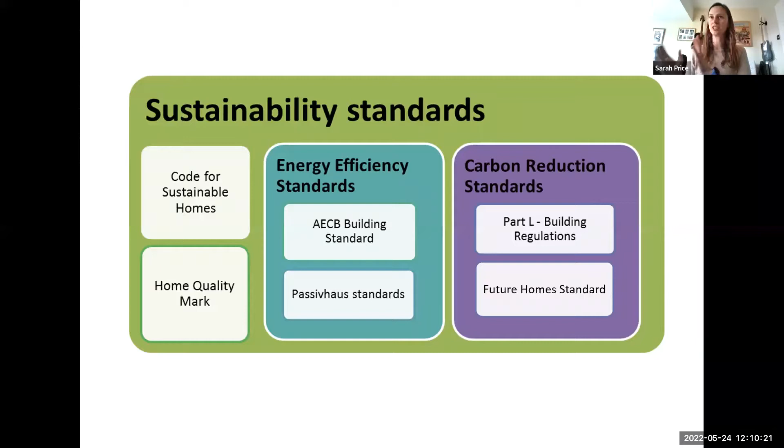So the AECB was founded in 1989, and they actually launched the Passive House Trust in 2010. So they brought Passive House to the UK. And their purpose is to deploy environmentally responsible building practices. So the AECB really looks at the cutting edge of what's going on in buildings, in retrofit, in new build, and making sure that we are doing the very best when it comes to our buildings.

They do an awful lot of training. They do loads of things as a membership organisation, obviously, lots of training under the CarbonLite brand. But we also have these standards, AECB building standard, and there's a retrofit standard as well. And it's the building standard that we're interested in today. I'll talk a bit more about that in a second, but there's also some complementary mini standards, if you like, around water, daylighting, and whole life carbon as well, which is the newest one.

So the AECB standard is based on the Passive House Standard. So originally we used to have different levels, silver and gold, and the gold was replaced by the Passive House Standard, and then the silver became the AECB building standard that we know today. It's got slightly relaxed targets compared with Passive House, so the space heating demand isn't quite as onerous, but there's still quite a good air tightness target. And essentially, the rest of it follows all the rules of Passive House.

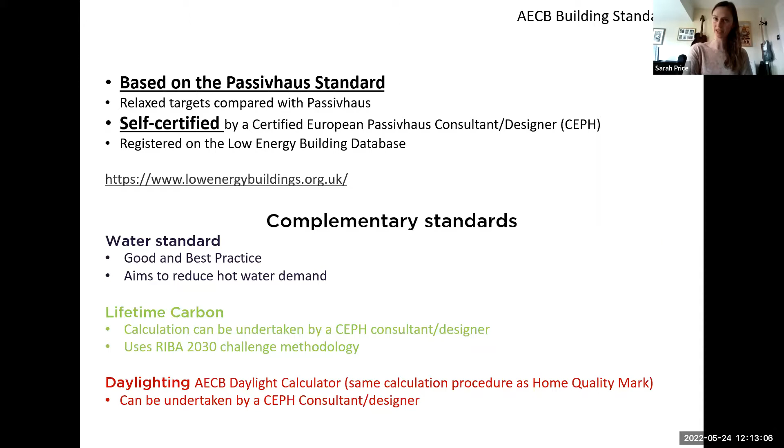So AECB and Passive House principles are that we are aiming for low energy bills and comfortable living conditions. We've got possibly southern orientations, but we're making the most of that solar gain without having summertime overheating. We've got high levels of insulation, ideally a thermal bridge free design, or certainly continuous insulation. We've got continuous air tightness, absolutely, so really low levels of air tightness.

And in Passive House, certainly we have high efficiency heat recovery, MVHR. The AECB is actually slightly flexible. You can have MEV or MVHR, but today we are really focusing on the MVHR side of the AECB standard and the air tightness that goes with that. So the 1.5 air changes that goes with that MVHR.

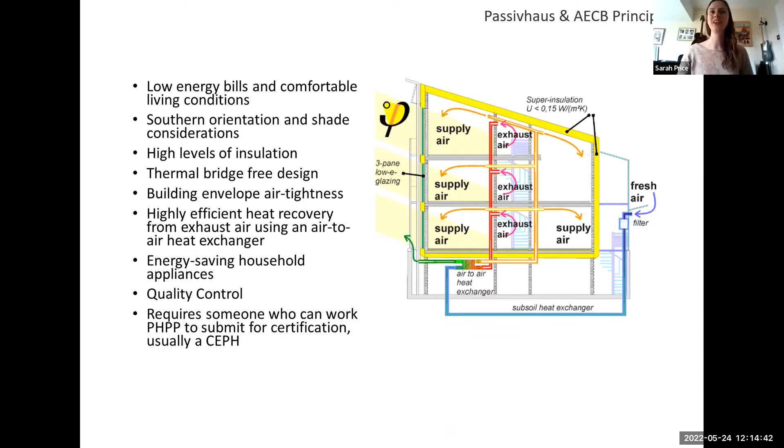Obviously, it's not all just about space heating. We have to look at everything that goes in the building. So we're talking about regulated and unregulated. And then we've got a quality control process. So in passive house, it's slightly more rigorous. You have obviously this third party independent certifier who checks all of the information that's coming in. And in AECB, you have to bare all and put it all on the internet in order to get your project certified and upload certain types of evidence that's required for the low energy building database.

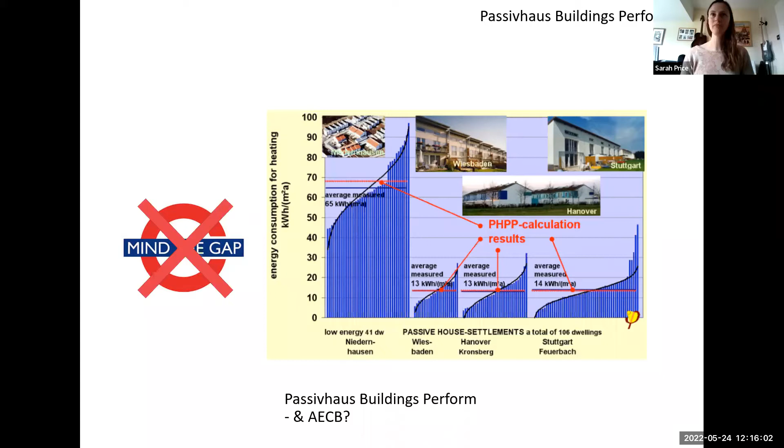There is evidence that AECB buildings are following the same kind of profile. So they've redone this research in the UK for passive house buildings, and their findings are the same. For AECB buildings, it's not yet published, but there is evidence out there that they do also perform.

So on the other side of things, we get a lot more out of passive house and AECB because we get superior comfort. So sometimes passive house is known as a comfort and energy standard. And that's simply because you go in a passive house and you don't notice it. You don't notice you have hot head, cold feet or anything like that. It's just perfectly still, it's perfectly quiet, reduces noise pollution because of the air tightness. You've got no temperature gradients, there's no drafts.

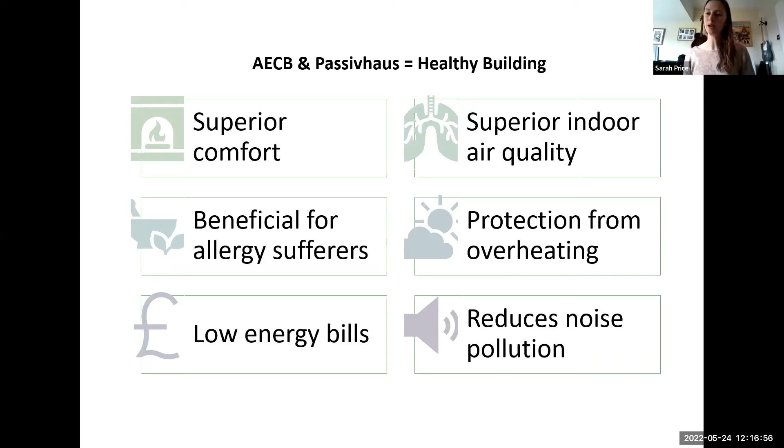A really good indoor air quality, so it doesn't feel stuffy. It's not too hot, it's not too cold, so we've got protection from overheating. It's beneficial for allergy sufferers on the health side because we're trying to filter out all of those pollutants from inside and outside of our homes and buildings. And we've got really low energy bills as well. So lots of other benefits from AECB standard.

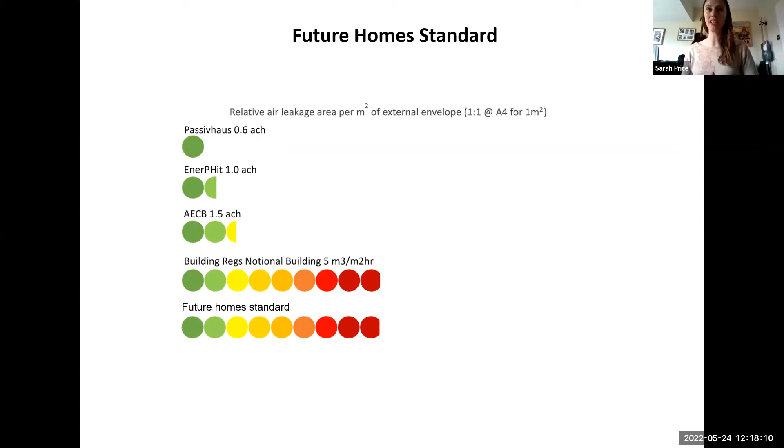Now for passive house, obviously it's quite small, and EnerPHit, the passive house retrofit standard, a little bit bigger, and then the AECB MVHR at 1.5 air changes. Building regulations notional building is set at 5 metres cubed per metre squared hour, and you can see quite a lot more holes in every metre squared. Now, where are we going with the future home standard? Therein lies the problem. We're not going anywhere with it in terms of air tightness. The suggested future home standard indicates that there's going to be no improvement in air tightness.

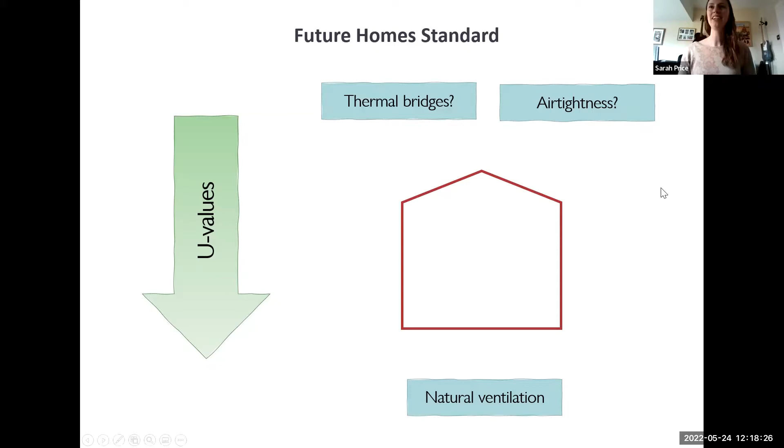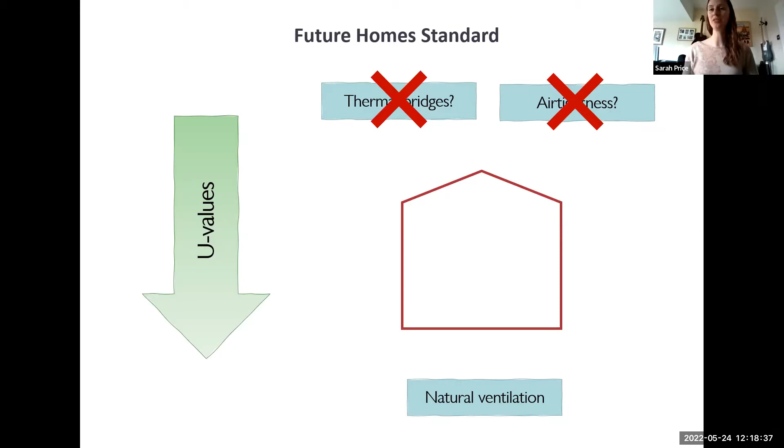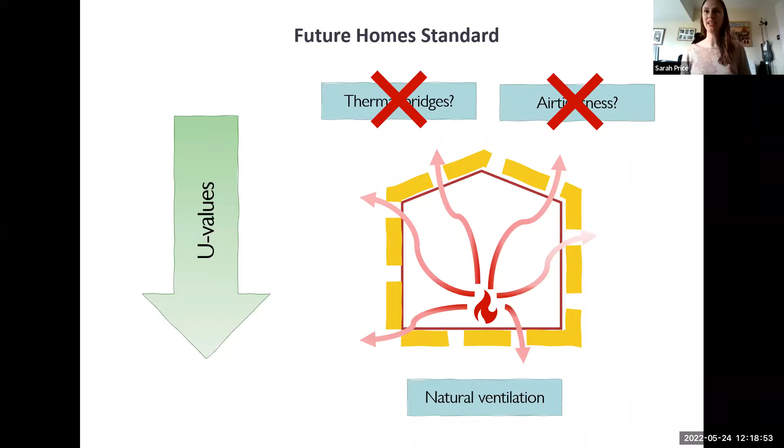So what we do see is a dramatic drop in U values. So we are really increasing the amount of insulation we're going to put in our buildings. But is it really dealing with thermal bridges and air tightness? Unfortunately not. We're not seeing any improvements in air tightness or any improvements in thermal bridging, and it still allows natural ventilation. So actually what we're doing is building really well insulated wind tunnels. So lots and lots of insulation, but it's not continuous. We haven't got good air tightness, we've got natural ventilation, so we're going to be letting a lot of that heat out in other ways.

This takes us nicely on to Wolfgang Feist, who was the father of Passive House in Germany. In the late 1980s, he gave this statement: "I was working as a physicist. I read that the construction industry had experimented with adding insulation to new buildings and that energy consumption had failed to reduce. This offended me. It was counter to the basic laws of physics. I knew they must be doing something wrong, so I made it my mission to find out what and to establish what was needed to do it right."

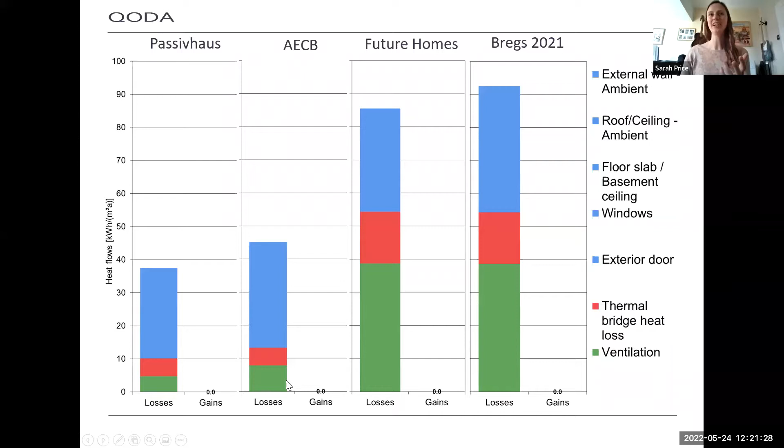Future Homes Standard, U values are improved, so we can see the blue bit is reducing a little bit, which is what we'd expect to see. However, no improvement in thermal bridging, no improvement in ventilation. AECB standard at 1.5 air changes really improves ventilation. We've got an MVHR as well, so we're recovering heat. We've reduced the thermal bridging. U values are about the same, but you can see that we've almost cut in half the total heat losses. And then Passive House reduces that a little further still because it's better air tightness. So you can see that what is left is really concentrating on thermal bridges and ventilation.

So I'm going to hand over to Tim, who's going to tell me when he needs his slides changing. Yeah, great. Thank you, Sarah.

Good morning, everybody. So we've been modelling 6 residential archetypes for a regional district council in England, pretty representative of anywhere. And we've developed a series of specifications based on different building standards. We've tried to apply a level of parity between the Future Homes Standard and the AECB and Passive House standards. So the AECB and Passive House specifications are actually a reflection of the Future Homes notional building standards as far as we know them. And they're not tied specifically to the AECB or Passive House targets, such as space heating demand. It's really just trying to get that notional parity between the standards.

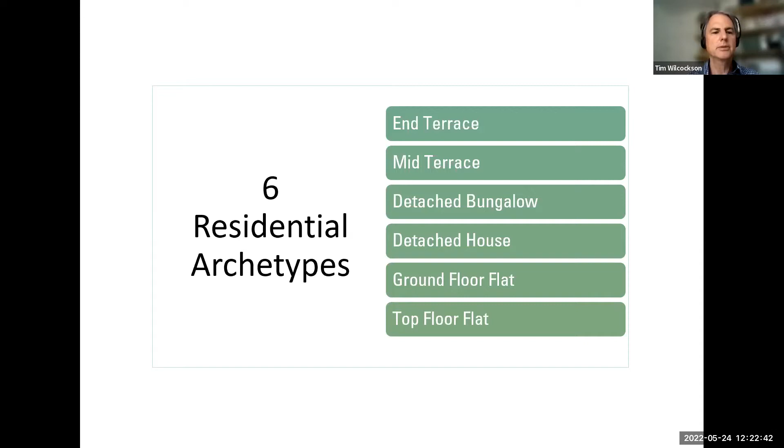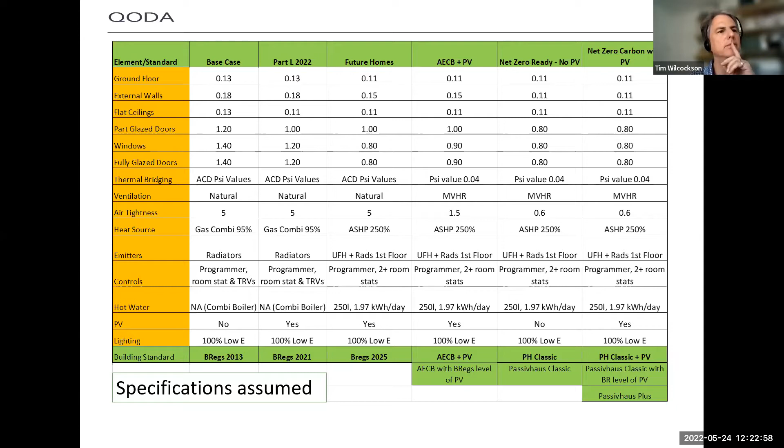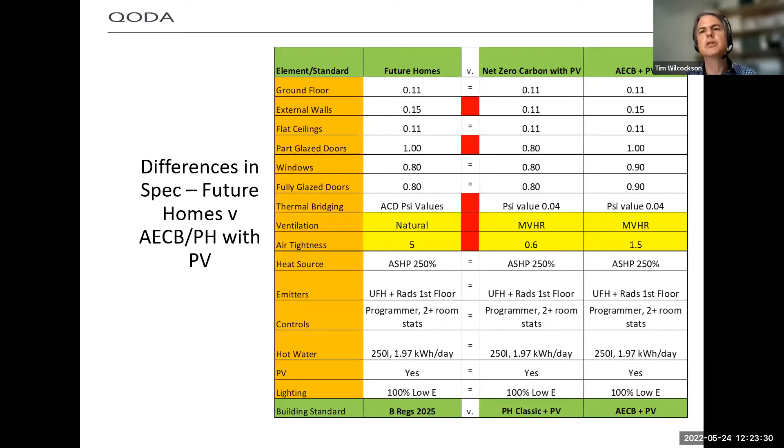So comparing these standards isn't ideal. Sorry, I forgot to say next. So these are the specifications assumed. We've got the different standards, and you can see the differences in the specifications in terms of the fabric are pretty similar, whether it's Future Homes or AECB or Passive House. They are remarkably close on that level. However, I would like you to notice the levels of air tightness difference and the type of ventilation system, which we see as the key elements when building future homes. Next.

So like all building regulations, Part L, Future Homes is rooted in the SAP methodology, and the new SAP 10.2, which will go live in June alongside the Part L 2021 regulations, will adopt increased cost per kilowatt hour. As we all know, it won't necessarily reflect exactly what we're actually paying. I've seen already for my home that we're going to be paying about 29-30 pence a kilowatt hour, maybe more. So energy costs are rising fast. But next slide.

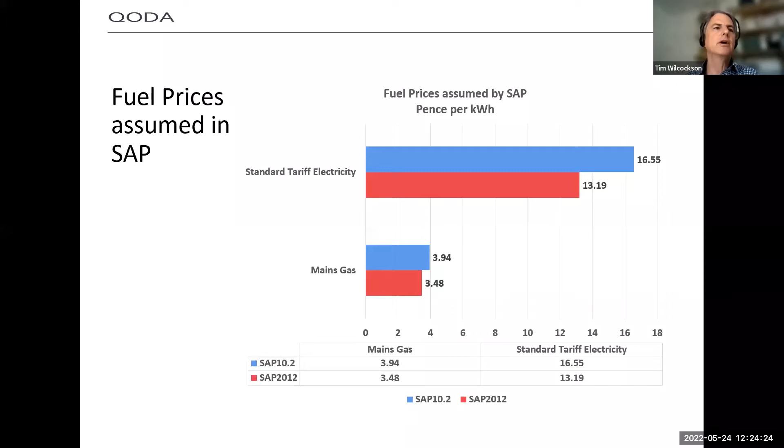The fuel carbon emission factors are coming down in SAP 10.2. So the Future Homes Standard has a stated aim of reducing carbon emissions by 75% and promotes electrification. I find it a rather curious coincidence that the contribution from renewables nationally has been calculated and apparently shows a 73.8% reduction in carbon emissions from electricity since the last evaluation in 2012. By contrast, there is little change in the carbon emissions factor for gas, but the electricity reduction is significant. Next.

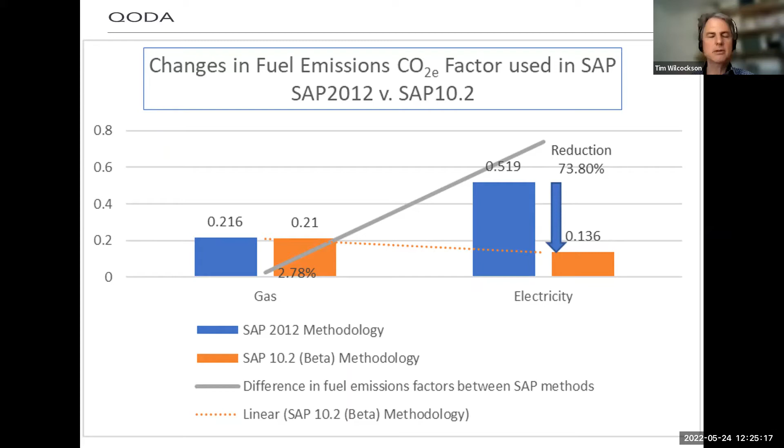So if we look at just one of these archetypes, we can see that while the building regs in 2013 and 2021 have relatively high CO2 emissions, the Future Home Standard appears to be heading towards net zero operational targets for 2050 with the aid of PV. This is using the PHPP methodology. And we can see a trend line showing a steady reduction in CO2 emissions via the different standards, as you'd expect, with significant improvements arising from the Fabric First approach.

In this example, the Future Home Standard, the AECB and the Passive House all achieve at least an 80% reduction in emissions compared to the 2013 building regs, and so are within the government target to align with net zero by 2050 through the decarbonisation of the national grid.

But the equivalent AECB and PH Classic standards with the building regs level of PV requirement, which is derived from a floor area formula, cut the carbon emissions by at least half again when compared to the Future Home Standard. And if you take the regulated emissions only, in the blue columns here, which is the SAP approach, you can demonstrate you're carbon positive.

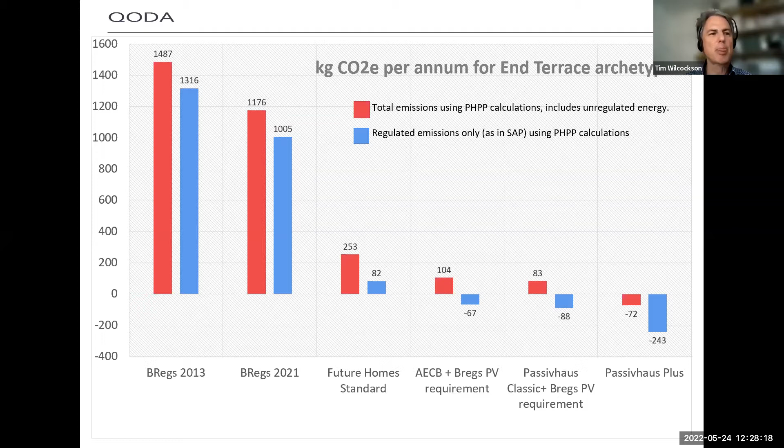So another way to look at this is to start with a fabric first approach, incorporating the MVHR ducting and air tightness that we need, and then add PV retrospectively, taking advantage of future improvements in PV efficiencies to enable minimal CO2 emissions. Something like the new panels based on perovskite, for example, in Oxford. This approach sounds remarkably like the Future Home Standard approach. It reduces long-term retrofit costs and occupant disruption, while locking in carbon savings for the lifetime of the building.

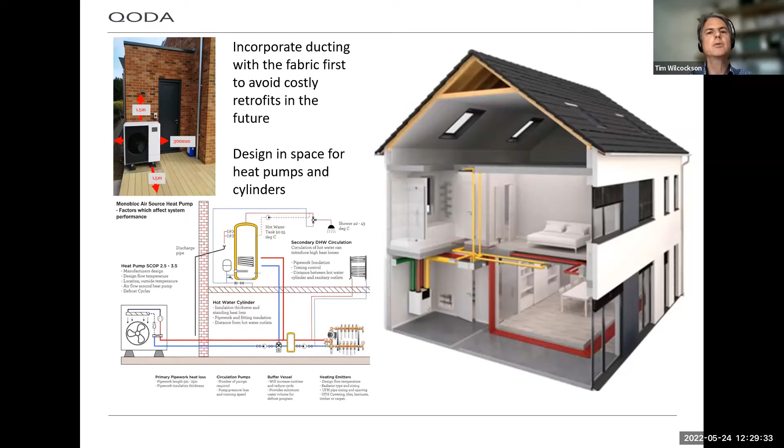Future-proofing by designing in space for heat pumps and hot water cylinders or cabling for energy storage would be sensible design precautions to ensure the fundamental fabric of a new building doesn't need to be disrupted. However, the Future Home Standard fails to provide the key element in the jigsaw, which is the air tightness of 1.5 or less with an MVHR system. Next.

So here we're looking at the space heating demand. We've looked at the downward trend of the CO2 emissions, but the more significant, in my view, startling finding from our analysis is the space heating demand story. Looking at the 6 archetypes again, the SAP 10.2 software gives us failures on the 2013 building regs, as you'd expect. No surprises there.

And the Future Home Standard and Passive House Classic both pass building regs as anticipated, with the Future Homes archetypes achieving net zero in 4 out of the 6 house types. Whereas in the Passive House approach, they're all achieving net zero effectively with SAP 10.2. The End Terrace only fails by 0.2%, so I'm counting that as being net zero really.

If we compare the space heating demand results of the Future Home Standard with any of the Passive House standards, there is in fact a further 78 to 96% reduction in the heating costs, according to SAP. So we're led to the question, is the Future Home Standard adequate for tackling fuel poverty? Especially in the current fuel and cost of living crisis, is it fair that we build homes to a Future Home Standard that actually costs 75% more to heat than it really should for a modern home?

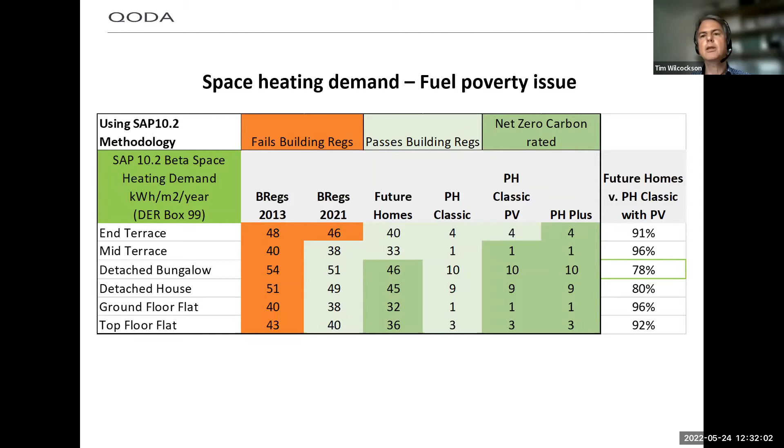The cost of constructing an AECB or Passive House Standard home has been shown to be an uplift of about 6 to 8% compared to constructing a Future Home Standard home. But the annual long-term savings in energy bills that the AECB approach can bring will hugely benefit individuals and bring many other positive impacts locally and nationally in ways that more than repay these upfront capital costs. Next slide, please.

So the Future Home Standard shows high levels of space heating demand here. Take the End Terrace, 68 there. AECB, 21 kilowatt hours per meter squared per year. We've got the same amount of PV on the AECB example as on the Future Homes example, and yet on the AECB standard we can still see a 63 to 77% reduction in space heating costs. And if we were to build it to Passive House Classic standards, we'd be talking about 71 to 86% savings on space heating.

So this slide alone, I think, demonstrates why the Passive House approach is important for people living on a low income. And of course, it benefits the country as a whole with more cash available for infrastructure. And we've got an example of Exeter Council where they've had a Passive House approach to building for some years now, and they've shown time and again they've got a better retention of tenants, lower property voids, people pay their bills, there's less stress for tenants and management. So everybody's a winner. Next slide, please.

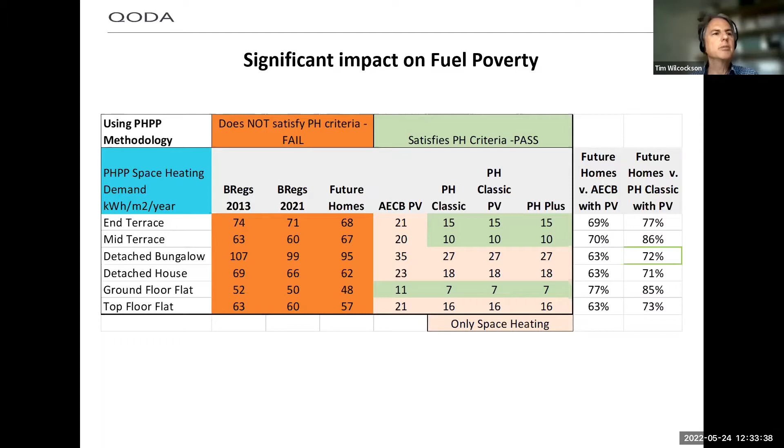And the International Energy Agency report back in 2014 illustrated some of the benefits of this low energy approach. It really has a very big impact in many areas of our lives. Next slide, please.

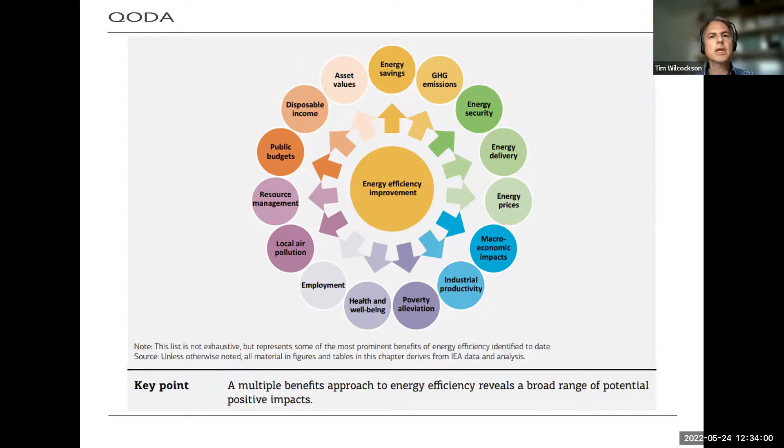So when we look at these two approaches, whether it's through the SAP building regs approach or through PHPP, we can see in both cases that there is a dramatic reduction in space heating. What we see with the Future Home Standard is that we can provide a well-insulated wind tunnel, as Sarah has mentioned. But really what we're looking to is get some woolly jumpers with a Gore-Tex wind barrier included if we take the AECB and passive house approach. It's really not complicated. We've just got to get the air tightness sorted out.

So SAP tends to focus on the carbon emissions, but as we move to decarbonisation, this focus will become less useful as a metric, and energy usage or energy demand will become the primary question. This is what LETI's arguing for, a more honest approach to our energy needs to inform our energy policies.

If we look at the yellow line, which is the detached bungalow, we can imagine that could be occupied by a person on a low income or with a disability or both. That's one injustice we could easily remedy by better air tightness, more robust fabric, and a good ventilation strategy. Space heating is, I think, about social justice in the end. It's not just about saving the planet. And it's what we're trying to do at regional level policy making, somewhere where everyone can afford to be more comfortable, healthier, and warmer. Over to you.

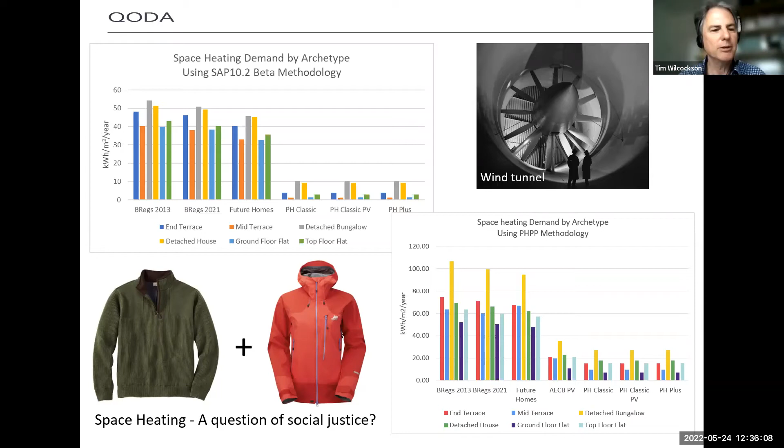Thank you, Tim. So I'm just going to try and summarise what we've been talking about. I've got a sort of technical stuff slide to start with, which I'll try and talk you through to make sense of some of what we've seen. So we had some interesting questions earlier when we did this to our team internally, and so this is why I thought to put this slide in. But one of the questions was, what is the main difference between PHPP and SAP as a modelling tool?

But more importantly, I think, is how we measure what a good building is, and that is what Tim touched upon. The fundamental problem with our building regulations is it's driven by CO2 emissions reduction, which gives us a technologically advanced building, lots of solar PV, etc. Now, they have gone some of the way with improving U values, but it's not the same as a fabric first approach that we see in the AECB standard or the passive house standard, which are driven by heat demand and energy. So that's the left-hand side.

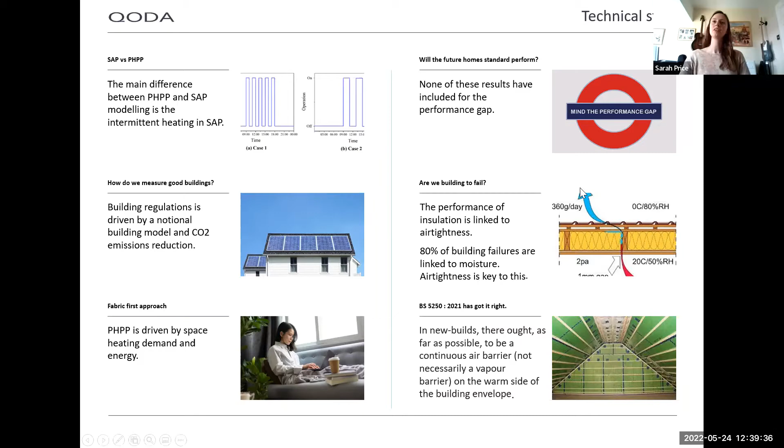So that's the technical stuff. But our conclusion from this is that Passive House is the new build standard which we should be aiming for. There is no excuse to build any worse than Passive House. AECB building standard is a stepping stone to this. It takes you down the right path of air tightness, etc., but gives you that little bit of leeway if you've not done it before.

It's being adopted by some councils, taking it forward in various parts of the UK. The future home standard might be net zero ready, but it does not take into account fuel poverty, health and comfort.

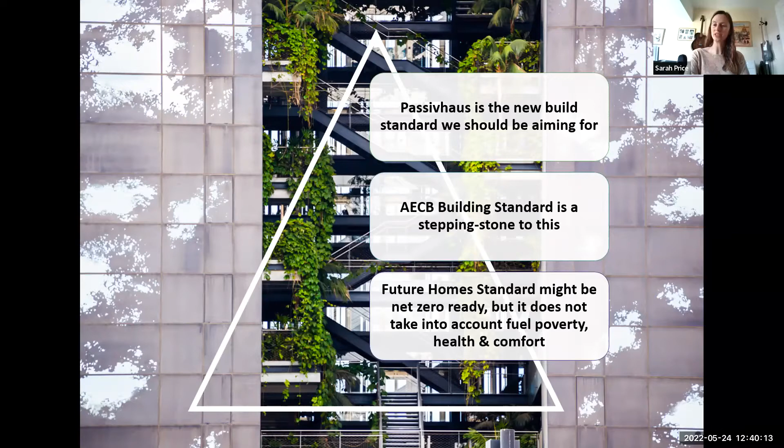And that, oh, one more slide. Yes, sorry, I've forgotten about this one. I always forget about this one.

We did some interviews with contractors, developers and housing associations. This was on behalf of another council, because they asked the question, what is equivalent to Passive House? And the results were 83% said there is no equivalent. And the reason it was only 83% is because the other 17% didn't know. They didn't have enough technical knowledge to answer that question.

So I think that says a lot really about Passive House, in the fact that there isn't really anything else that is as good as Passive House in terms of performance and Fabric First standard.